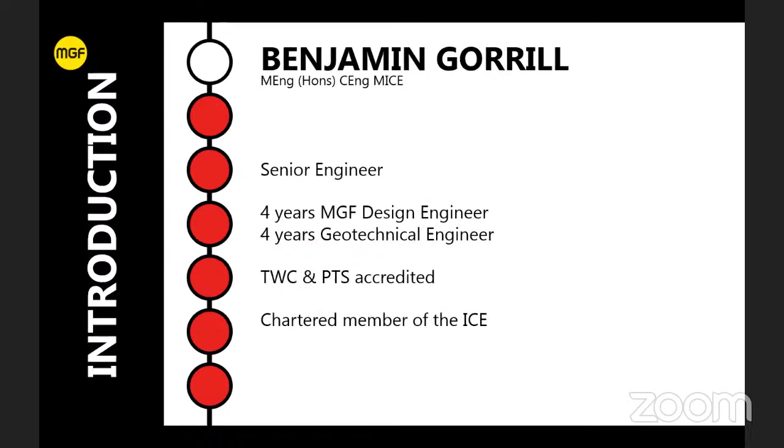Okay, so in terms of an agenda for this morning's webinar, what we'd like to do is just give an overview of how we see innovation in the rail sector. This can come in various guises, principally by collaboration, also by process and design, products, and we're going to touch on some case studies as well.

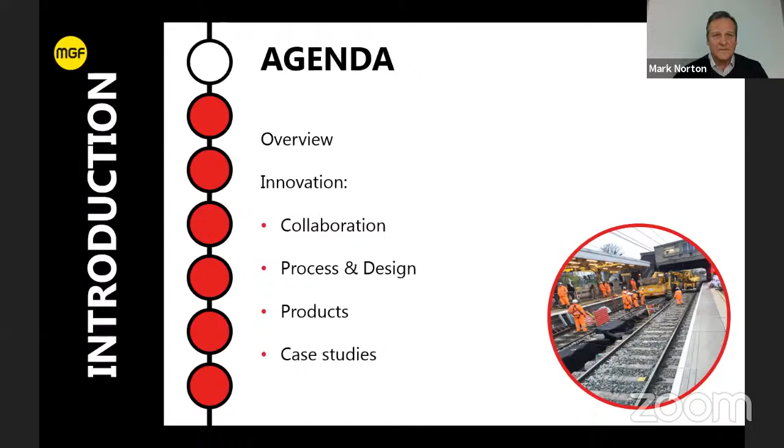So how and why is rail different? Well, the rail infrastructure is a very dangerous environment. In the past, the distant past, at the turn of the century, there were some major incidents and accidents on the rail infrastructure, which identified shortcomings in the maintenance of the infrastructure, particularly when works were going ahead. Controls were introduced by Network Rail, which must be strictly adhered to when working on the rail. These are the Network Rail standards.

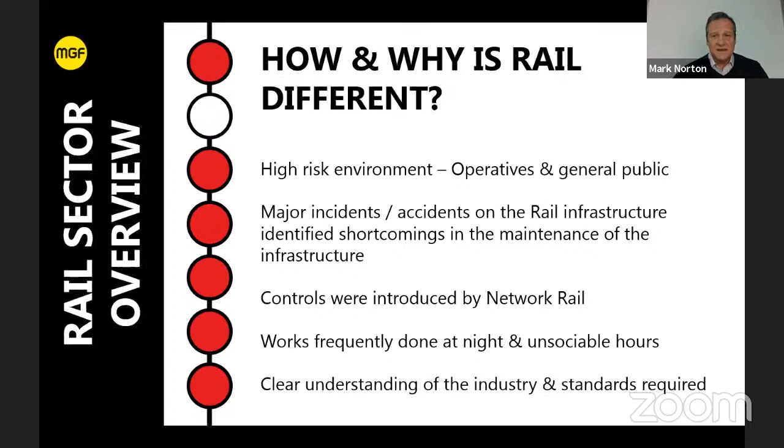Works on the rail are frequently done, as we know, at unsociable hours, i.e. at night or in the dark or on public holidays. They're a high-risk environment for operatives and the general public, and a clear understanding needs to be had of the industry and the Network Rail standards.

So how are the working practices critical when working on the rail? It's normally done in short possessions, either at weekends or alternatively at bank holidays and things like Christmas. And there's pressure on outputs and increased safety risk. It requires much planning and organisation. The works must be done safely and in line with work plans. And the consequences of getting the temporary works or the works itself going wrong are huge. Safety is compromised, works can be incomplete, which results in possession overruns.

There can be severe financial penalties and loss of reputation and future works. So an opportunity exists for us to assist contractors to provide innovative solutions via quality designs, a full service, including Network Rail forms, getting it right first time, via bespoke products and services, and ultimately a safer, faster, and improved efficiency.

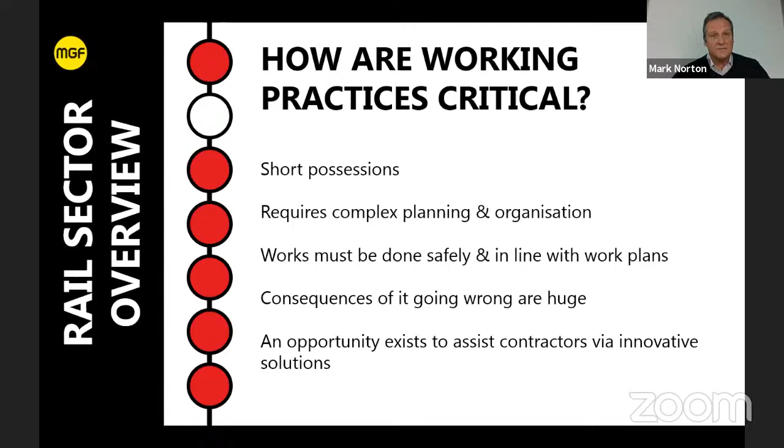So who does the work? The work is principally done by many parties. We typically engage with contractors, but we can also engage with the principal contractors. So it could be the subcontractors, principal contractors, but we also have an interface with designers, principal designers, and also in many situations, the client as well.

So we've just done a poll before, and thanks for completing the poll. If you've engaged in that, that's very good of you. We asked a question: at what grip stage would you typically engage temporary work specialists? And there's some interesting answers there. 28% said grip 4, 20% said grip 5, and 8% said grip 6.

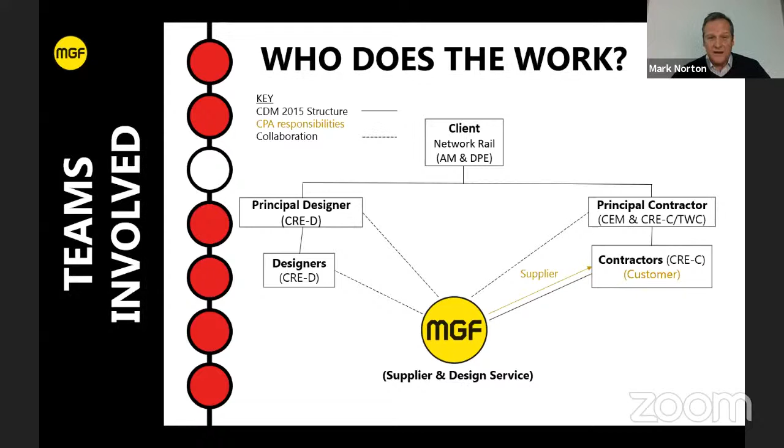I have to say, we primarily get involved and engaged at grip stage 6. Those are the grip stages shown on there. So we won't go through that in massive detail, but certainly 4, 5, and 6 are the areas where it moves from development of the design through detailed design and into construction, test, and commission.

So typically we tend to get engaged at 6, and we have to say it would be nice, or I think a good objective would be to, if we could get engaged certainly at 5, but if possible, it would be great to get engaged with the industry and the contractors at level 4 regarding upcoming schemes. I think temporary works is quite often one of the first activities required, but the last thought of, and that was the theme of our colleagues' webinar delivered a month ago by two of our colleagues.

So typically we see involvement, as we say, at grip 6. It would be good, however, if we could get involved earlier. Now we'll come on to the reasons for that shortly. There's an opportunity to highlight risks, provide solutions that may affect program and add cost. Principally by us getting involved earlier, we hopefully can reduce cost.

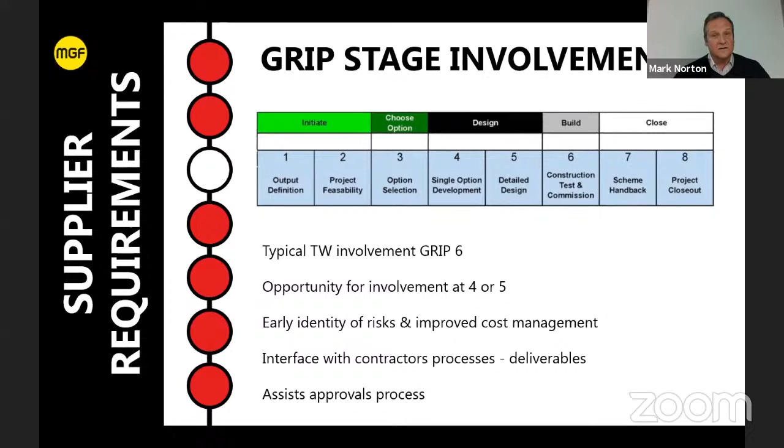We often need to work on contractors' critical path activities, and temporary works is not always thought through in terms of the process, and not least, Network Rail need time to approve. We can assist in this regard, and sooner than perhaps anticipated, via ECI - the sooner we get involved, the more we can help in terms of the thinking regarding temporary works and come up with innovative solutions. We also like to get involved with tender appraisals and conceptuals, and we can, in that process, identify risks and look at getting engaged with the temporary work schedules with the contractors.

So what are the requirements of the temporary works supplier? Well, they must have experienced rail sector staff, must be able to produce an agreed brief, which is key, and the scope of the works agreed early. We need to do design once and only once and avoid reworking if possible and cut out waste for all. Design briefs must be clear and easily understood by the temporary works designers.

Not always possible to visit sites on the early days by the designer. Quite often it could be one of our sales team who are visiting the site, and what we need to do is get that brief, a clear brief, across to our designers so they can work on it. The design produced must be simple to understand and readily understood by all in the chain, be it Network Rail, the principal contractors, the subcontractors, and ultimately the operatives and the machine drivers and everybody who's doing the work. The designs must be clear and concise and be able to be quickly approved.

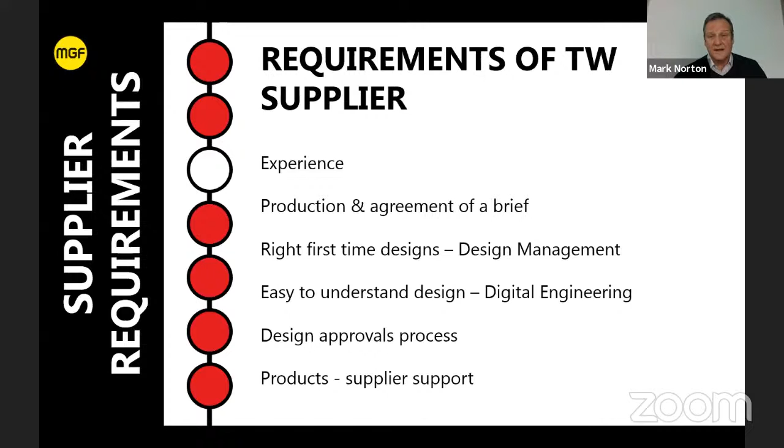The temporary works supplier should be available for on-site support if required via safe systems of work guides, for example, toolbox talks. Things change and we need to be there to support the contractor when they do, and we must have robust procedures and compliance in line with Network Rail standards.

So in terms of innovation, which is why we're here this morning, the designs produced should be quality and embrace the latest technology and products. Network Rail and the contractors are looking for the best, safest, most economical solution backed up by design.

Network Rail and the principal contractors want to know there's a design process in place, and this is transparent. The quality of the brief produced is key and will determine the quality of the design. We prepare this and share it with the customer early on for input.

We employ the latest design software and drafting tools like 3D Revit, which are clear and concise. Ben will come on to those with some examples a little bit later. And the scope of the works needs to be agreed very early in our appointment.

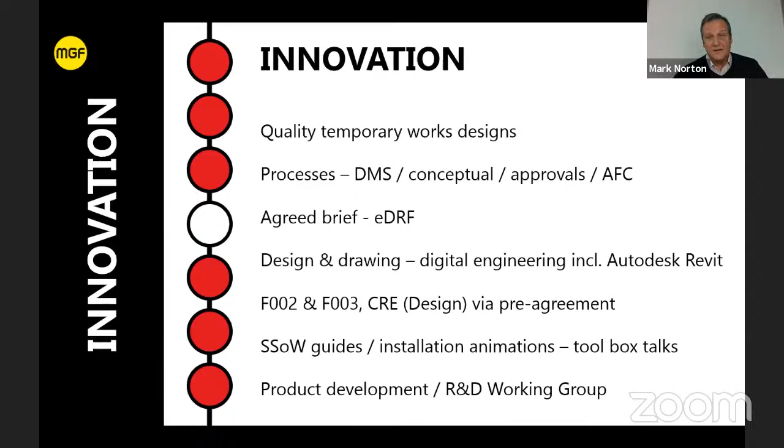MGF offer a full range, including F002s and F003s, and then we need to back this up when the job is done with safe systems of work, video animation, toolbox talks, and utilize the best products available in the market for the job, which need to be available nationally. We also get continuous improvement by listening to feedback from our customers and reinvesting through our R&D team.

So early collaboration, the first stage of our collaboration is really to get an inquiry from the customer via our technical sales team. As Emma mentioned earlier, we have a dedicated team of salespeople up and down the country who work very closely with rail sector customers. We're a small team, but we operate nationally.

We review the information which is provided to us, and quite often we need to request additional information if the information as provided is not complete.

Principally what we're looking for is a full suite of drawings, as much ground investigation information as we can get, copies of the relevant borehole logs, and photographs. Quite often we get a customer brief, and also we need to know about services overground and underground, and be able to identify hazards.

These might be working at the toe of an embankment, on top of an embankment, or within an embankment, for example. Where possible, we like to arrange a face-to-face visit, albeit in the current climate we're in at the moment, it's pretty difficult to do that in some situations.

So we're embracing modern technology with things like Microsoft Teams, but at worst case scenario, probably a phone call. And we'd like to agree the scope and timing early on.

An EDRF is prepared, which we call an electronic design request form, and we prepare that online. Ben will show some examples later on of how we get the information back from the EDRF. And we submit a copy to the customer for verification that we've interpreted it correctly.

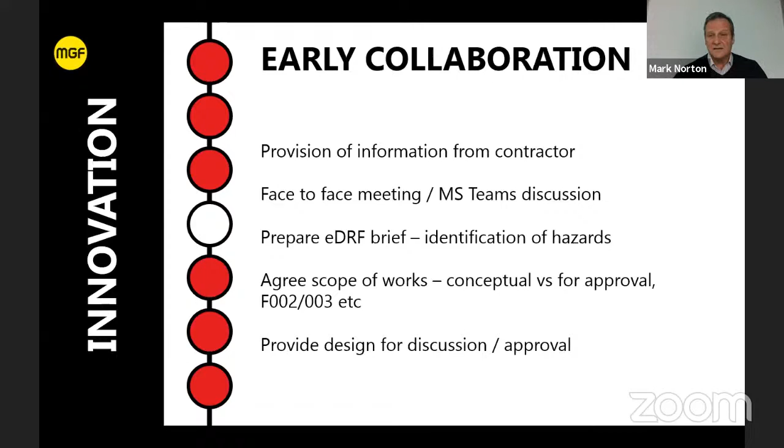So thanks for that. I'll now hand over to my colleague Ben, who will talk us through the design process and some case studies specific to rail.

Thanks, Mark. So I'm going to talk through some project examples with some animations. But firstly, I'd just like to introduce that we have a dedicated rail team within our design department, compliant with all the relevant codes of practice for temporary works listed at the top, including British Standard 5975, sometimes Euro codes, and all the relevant Network Rail codes, such as engineering management, assurance in building and civil engineering works, and geotechnical design.

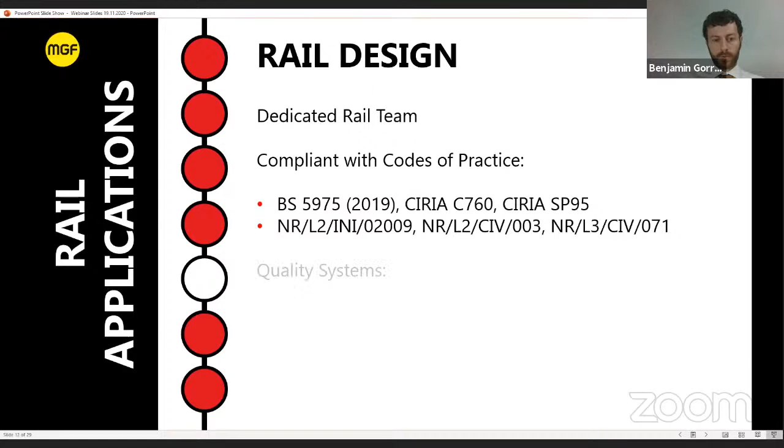In addition to this, we have some quality systems, including the EDRF that Mark's touched on, to make sure we can identify all hazards prior to carrying out a design, and a design management system. This helps our rail team to review and categorize all designs with a color coordinated system based on the risk and complexity of each design, which means that the correct designers and qualified checkers can be involved in accordance with the checking categories in the British Standard and also the Network Rail Code, the Civil Code 003.

Other initiatives include Safe by Design. We tune into the guidance notes produced by Safe by Design. We're an active member of the Temporary Works Forum, which focuses on best practice within the industry. And our research and development team look at new and innovative products quite consistently.

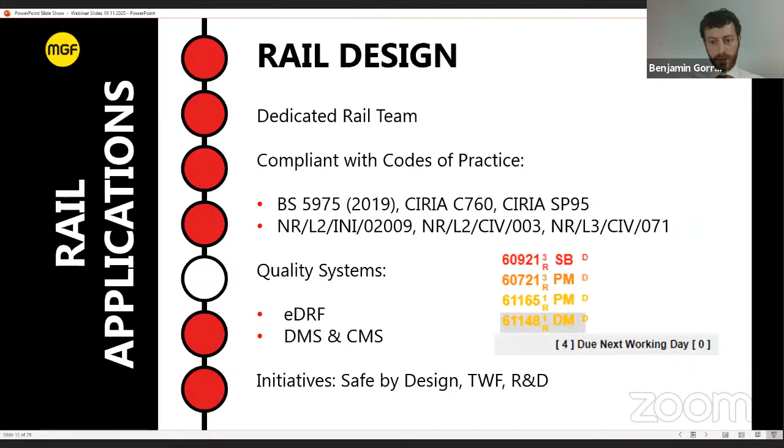In addition to the design and the calculations, we have a BIM team to level 2, which we basically use Revit software, which is capable of producing IFC files that can then be compatible with Navisworks or any other master file system. In addition to this, we have Autodesk Revit components on the website, free to download, that can then be incorporated into any master file.

And this helps to detect any clashes with permanent works, whether it be existing or new permanent works, or neighbouring temporary works. It helps to coordinate and have some spatial coordination. So this maintains speed, but with a quality output and 3D views, which is essential for identifying hazards. I'll show some examples of that later.

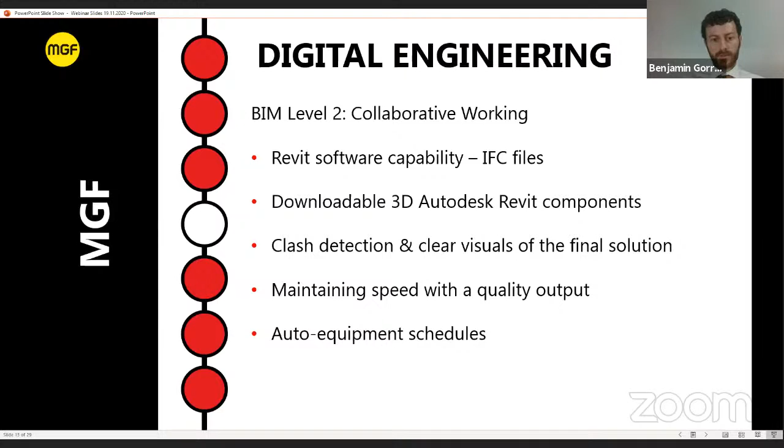In addition, we have some auto equipment scheduling as part of the Revit offering, which will list the weight and cost of each component. And we have some initiatives to also have some extra items such as embodied carbon.

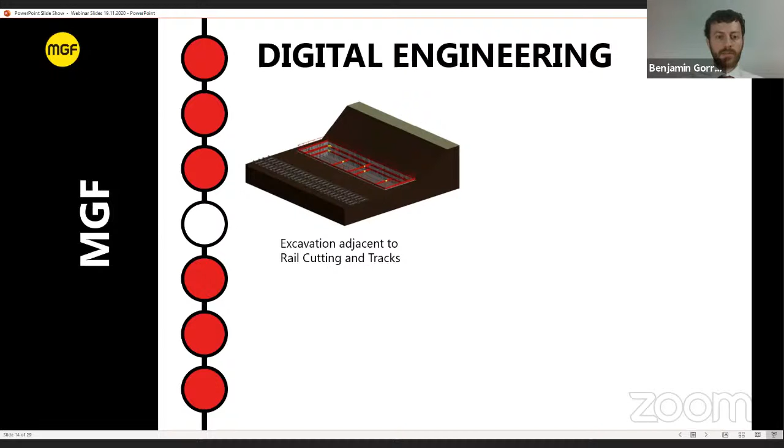Just to show some examples, this one produced by Revit shows a 3D view of an excavation between a rail cutting and rail tracks. We've got one here within an existing station.

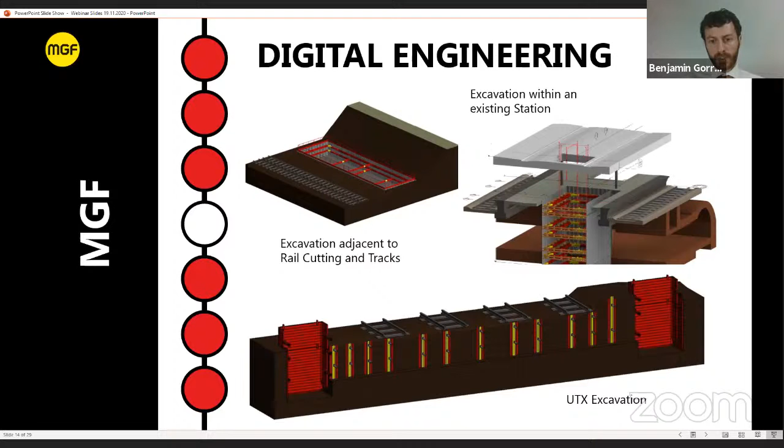What I'm going to focus on now is a UTX, or an under-track crossing excavation, with our GRP Vertishore equipment and boxes at either side to install the chambers. So challenges involved with under-track crossings basically include very short possession times, constrained sites, where there can be a limitation on using heavy plant and equipment. And also, as the temporary works or excavation crosses the rail line, there can be clashes with, say, existing cable ducts or rail tracks.

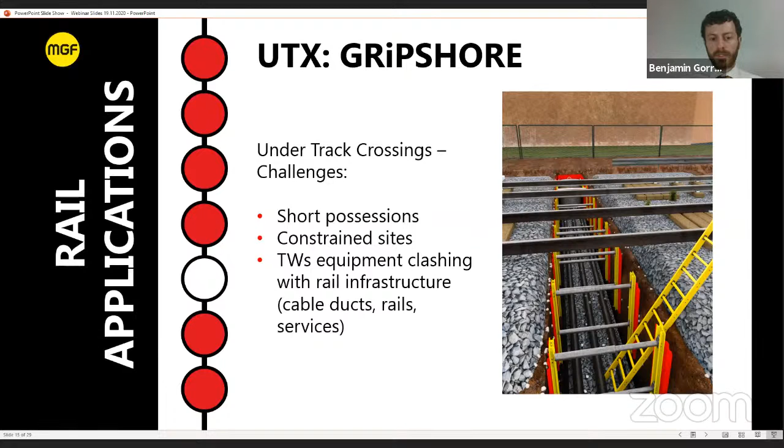So our research and development team produced this GRP equipment, glass reinforced polymer, that's very lightweight and transportable by hand. It can also be installed by hand using slings. We have a box system as shown here on the left and a Vertishore system, which allows gaps between units, accommodating any rails, cables or infrastructure that may clash with a normal temporary work solution.

In addition, it's very sustainable with low embodied carbon and energy throughout the life cycle compared to aluminium or steel equivalents. It's non-conductive, which makes it very useful on the railway. And it's very easy to assemble, and I'll show some examples on the installation sequences in a moment.

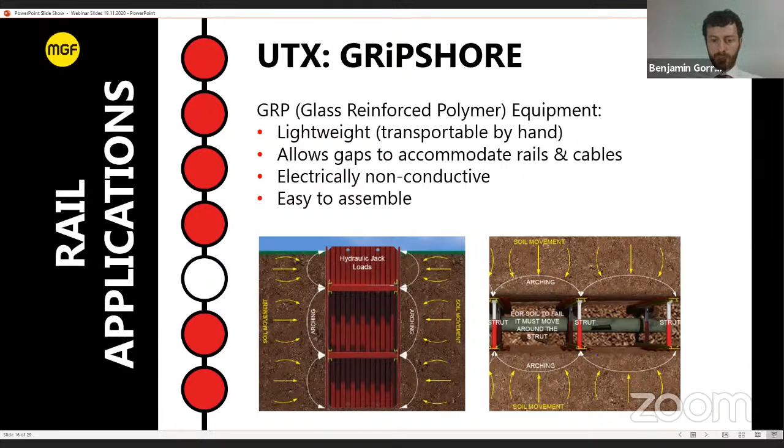Now, the gaps between the units work through soil arching. So each unit is preloaded with jacks to a specified pressure, which generates micro movements in the soil and generates an arch. So any operative can enter between two fully preloaded units.

The units themselves are basically installed with a trench pre-dug prior to lowering in the units. During the design process, we'll check the site investigation and boreholes to make sure that the ground conditions are competent and will allow soil arching to take place.

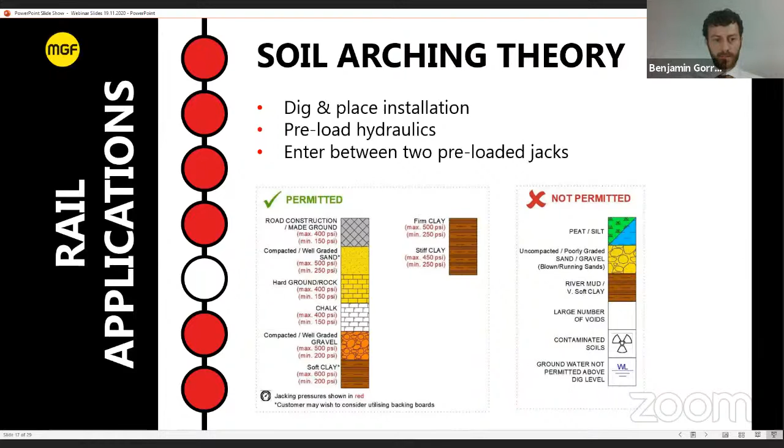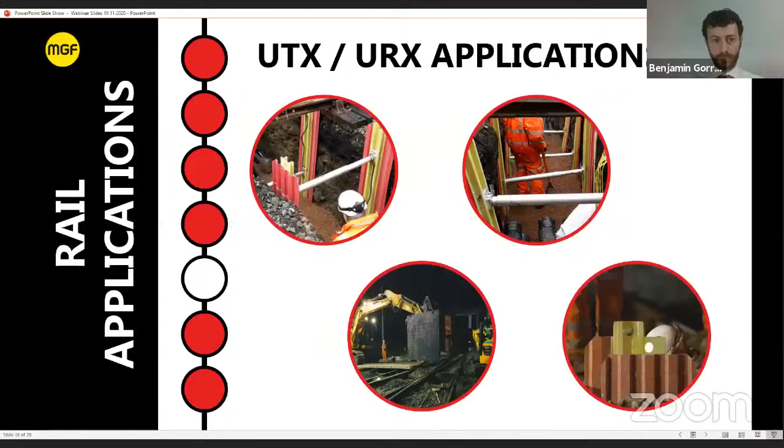As the UTX solutions are basically reviewed by our design team as Cat 0, so very low risk, simple, shallow designs, they're also applicable with standard solutions, which has been generated by our team over the last couple of years. This is where a standard design calculation has been undertaken based on predetermined conditions. Our team will then review each site specifically to make sure that all those conditions are satisfied.

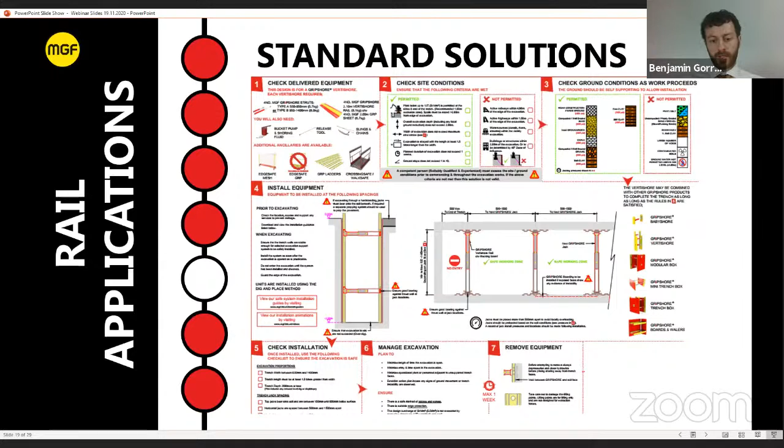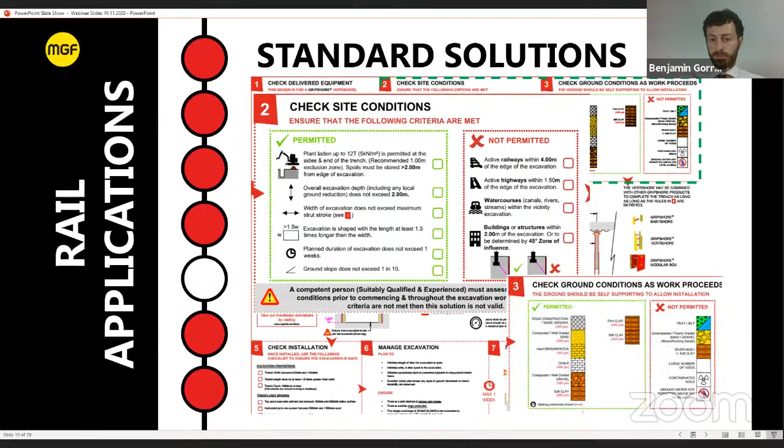This drawing is then issued to the site team, and there are some checks to be carried out prior to installing the equipment, such as a check of the site conditions and surroundings, followed by a check of the ground conditions. Once the equipment has been installed, other checks can take place while the equipment is in situ, such as making sure the gaps between the units are to the specified gaps for soil arching, and ensuring that the GRP panels are pressed firmly against the soil or the trench face to ensure soil arching.

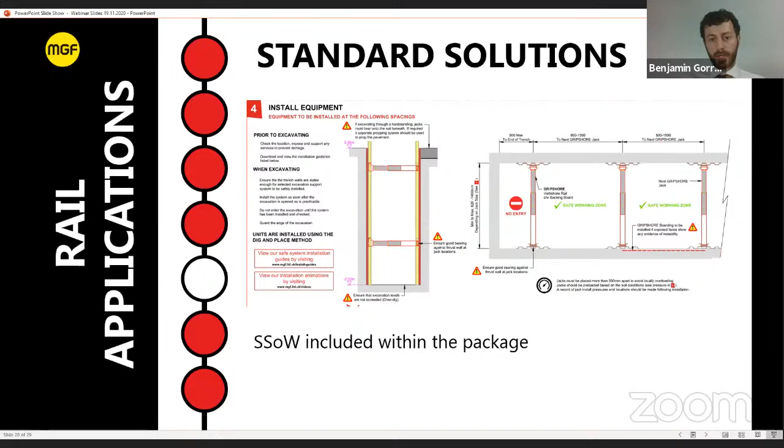With this package, there's a safe system of work, which includes animated figures showing a full installation sequence. So before I move on to platform locations and showing some examples there, I'm just going to show a short video just to reiterate what I've been saying about the UTX equipment.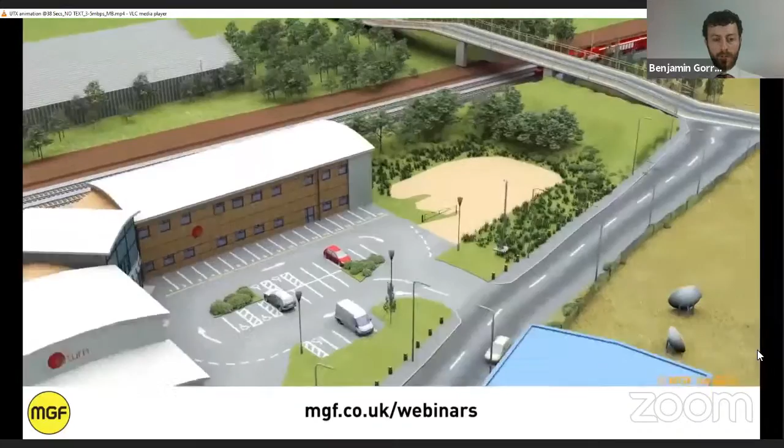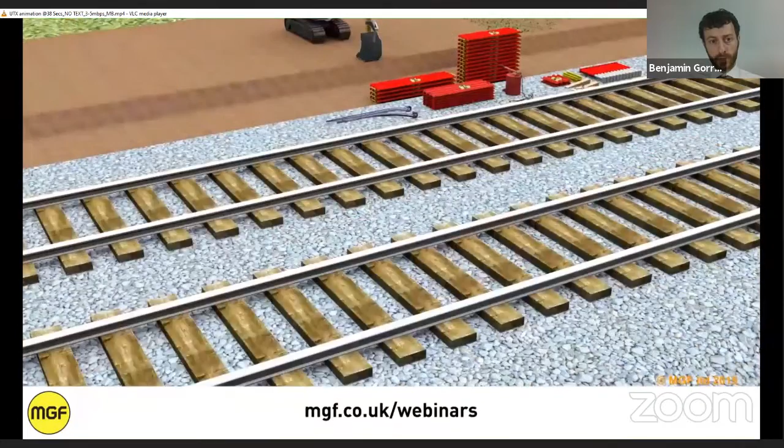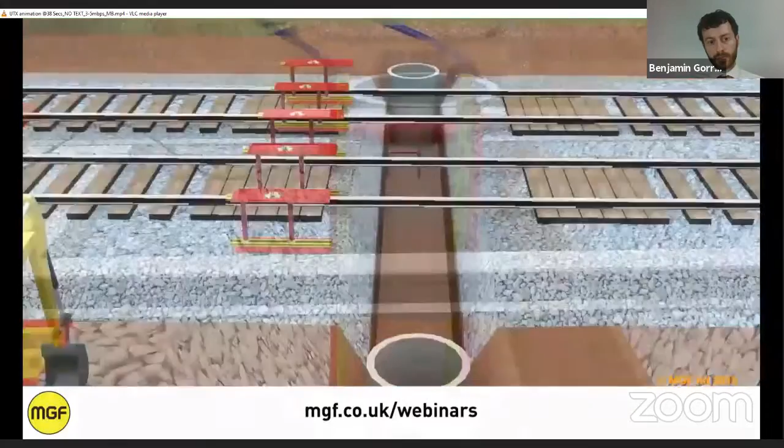For all UTX works, the railway will be under full possession. This example shows our GRP Vertishor units with backing boards being installed to lay the cable ducts under the railway. It can be installed by hand and lowered into the excavation using slings. Any voids must be backfilled. The units are then pressurized at a predetermined PSI pressure prior to laying the cable ducts and removing the equipment and backfilling the excavation.

So now I'll just go back to the slides and platform locations. There's a current incentive to make platforms more accessible on tight, restricted sites, to make sure there's a pedestrian interface to manage safety and practicality challenges. Solutions include lightweight equipment for ease of transport and use, and a thorough design process to identify all the surrounding hazards.

Oh, sorry. Sorry about that, everyone, technical issue.

So just to reintroduce, platform locations is a current incentive to make platforms more accessible. The challenges are installing new stairways or new lift shafts, with excavations within the platforms. Being in a platform location, it's very tight and restricted sites. There's a pedestrian interface to manage and safety and practicality challenges associated with that. Our solutions would always include lightweight equipment where possible for ease of transport in and out of sites and ease of use, encouraging efficient solutions. Also, we look at a very thorough design process to identify the surrounding rail hazards, which comes back to what Mark was saying in terms of early collaboration and making sure the brief identifies all the hazards on the site. Then we will look at installation sequences that align with the permanent work sequence.

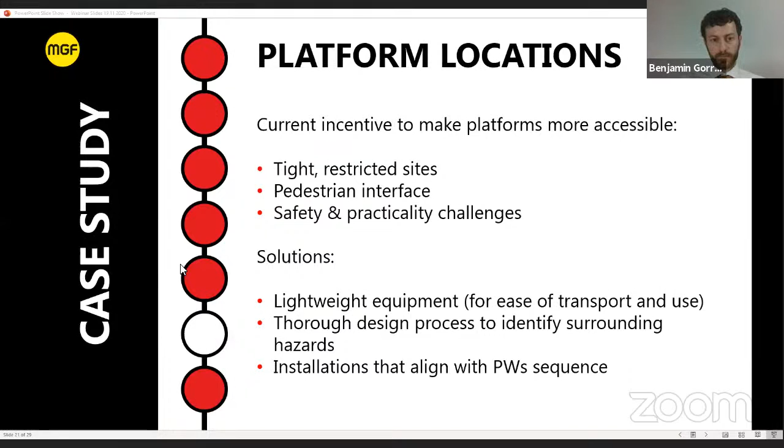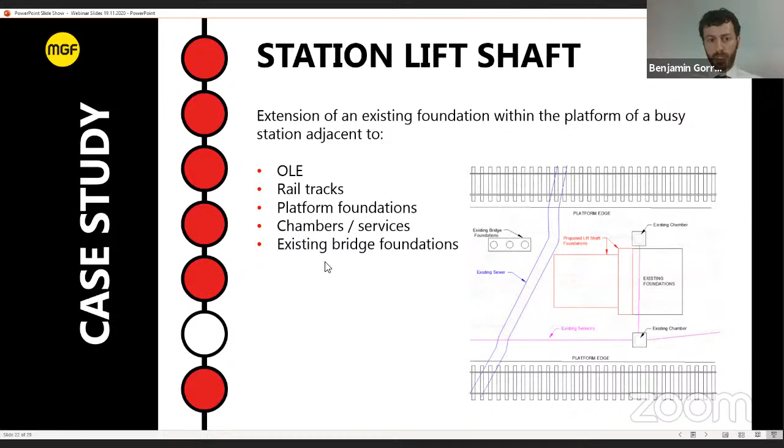So I'm going to show an example on a major UK station, where 2 foundations were to be installed, one larger one on the left here, and one smaller one to be jointed into the existing foundations. Surrounding these proposed excavations, there was an existing sewer, the platform foundations, the rail tracks, and existing bridge foundations and chambers. So quite a lot to take into account by design and by the site team.

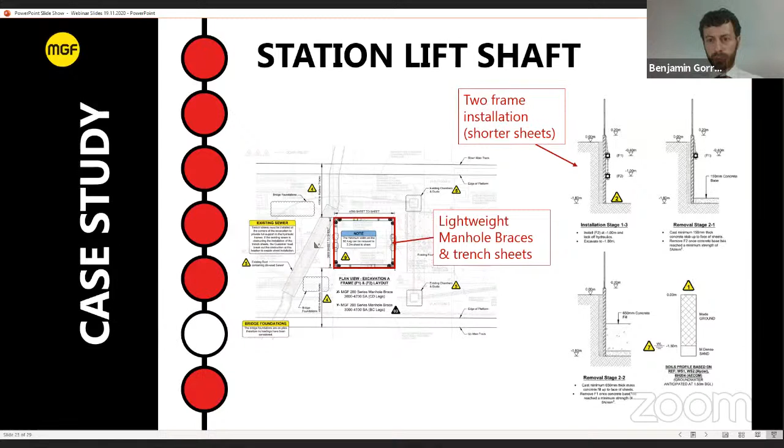To install the first foundation on the left, we looked at a lightweight manhole brace and trench sheet system, which would basically have 2 frames, using shorter sheets then, not requiring a toe-in below the actual formation level of the excavation, to reduce the depth influence of the excavation and the effects on the surrounding infrastructure. Also, a dig and push installation method that would prevent pre-driving of sheets and any vibrations that could affect the surrounding infrastructure. As part of the installation sequence, we looked at a method that would involve a concrete blinding being cast after the 2 frames have been installed, allowing the second frame removal. This would then allow the foundations to be cast in one pour using the sheets as a back shutter for a very efficient permanent work solution.

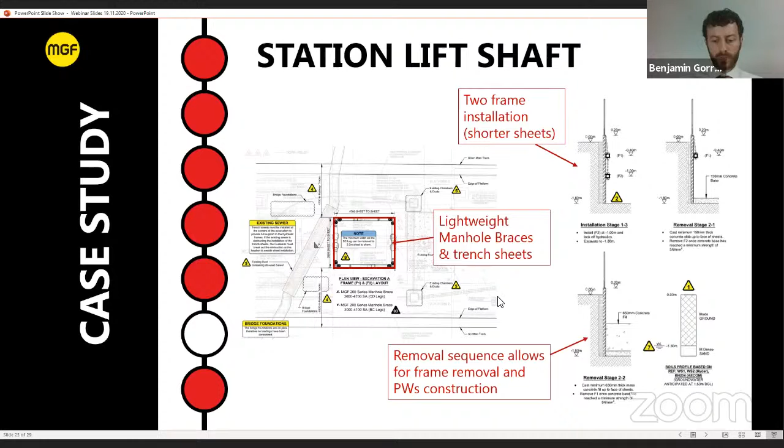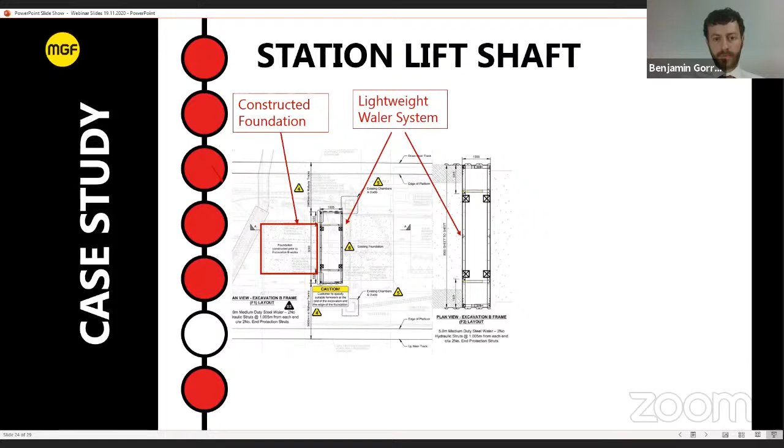On the next excavation in between the 2 foundations, we looked at a lightweight waler system, which would be situated between the concrete with sheets at either end to support the ground. This was installed with the same installation and removal sequence to aid permanent works efficiency.

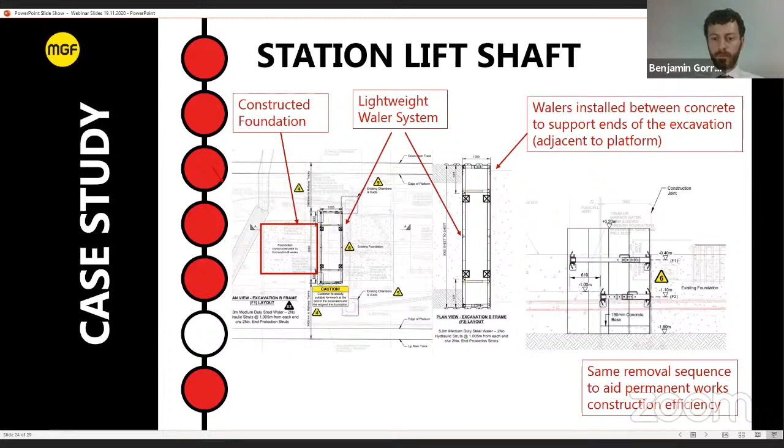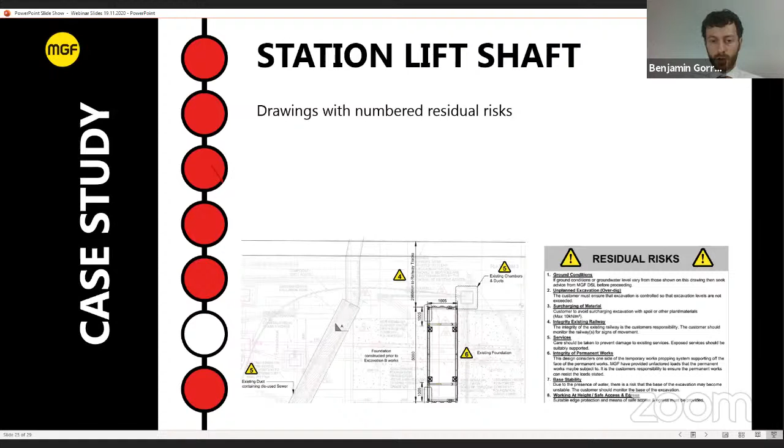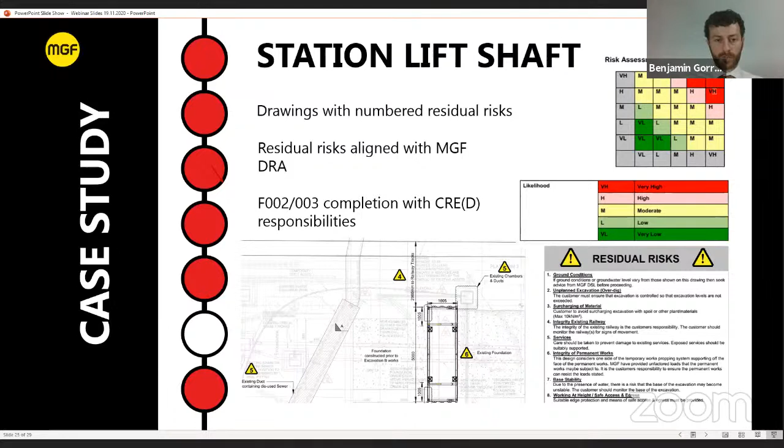As part of this solution, we had a very clear drawing system with permanent works underlays and a numbered residual risk system, which highlighted any risks that couldn't be fully reduced by design and any site control measures required by the site team. This was agreed in collaboration with the contractor, and a designer's risk assessment was included as part of the package, which included a risk assessment matrix showing the impact and probability of any risks. This documented the design reduction measures and all control measures to be carried out on site, and was supplied with a form 2 and 3 simultaneously.

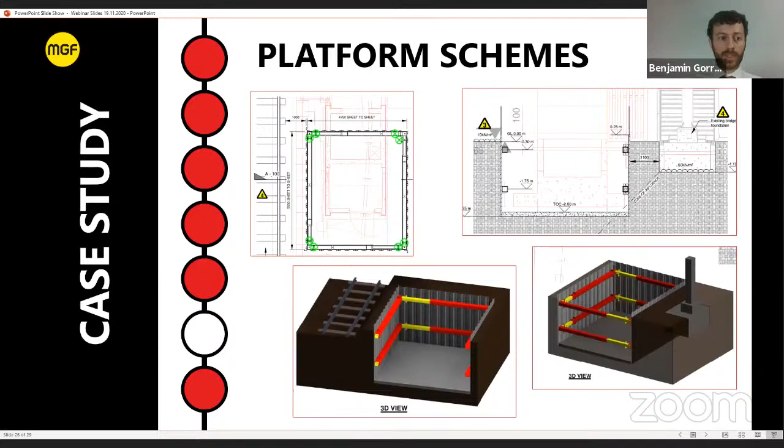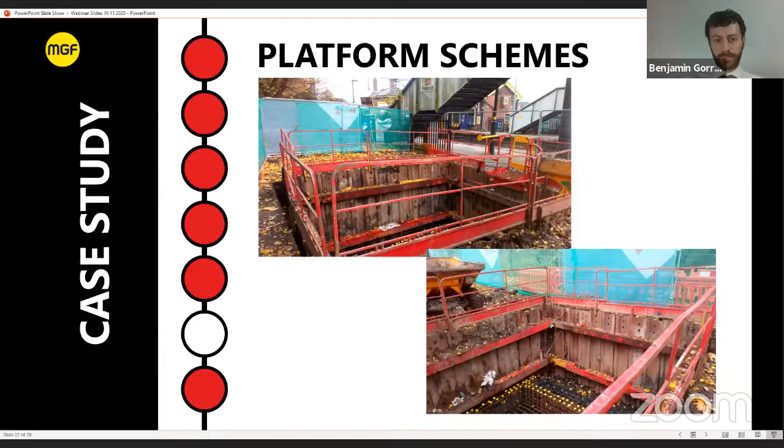Just before we conclude, I'm going to show another example with an animation this time, just showing excavations we carried out adjacent to an existing retaining wall and a main line.

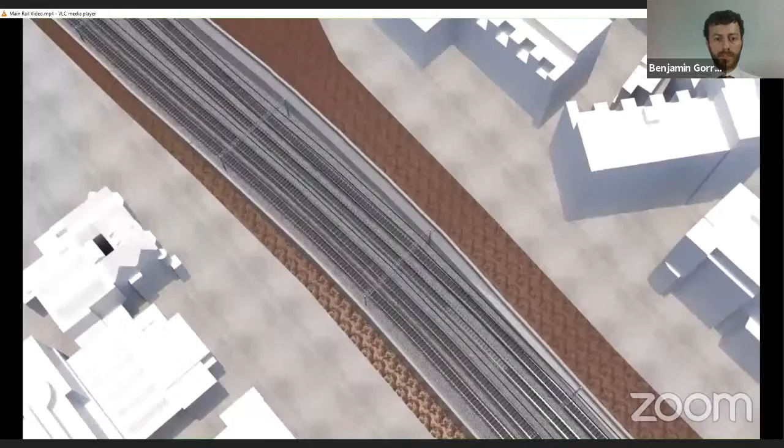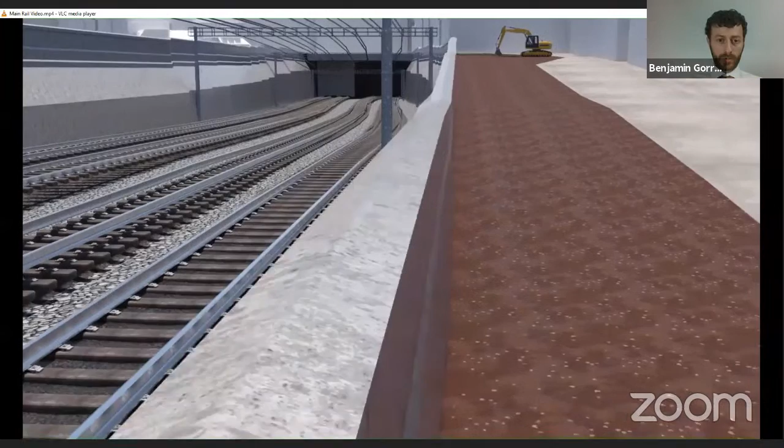So this was in a major UK city and involved a lot of collaboration with the principal designer and principal contractor. The works would basically consist of digging a number of trenches adjacent to an existing Victorian wall to uncover the foundations of the wall and also to check the condition of the wall.

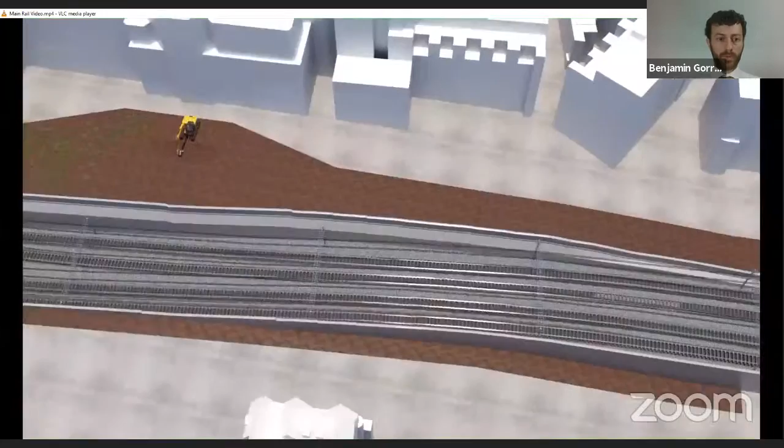The ground level was different at all locations. So what I'm going to do now is just focus on two locations, one which was an excavation above the railway and one that was an excavation below the actual tracks.

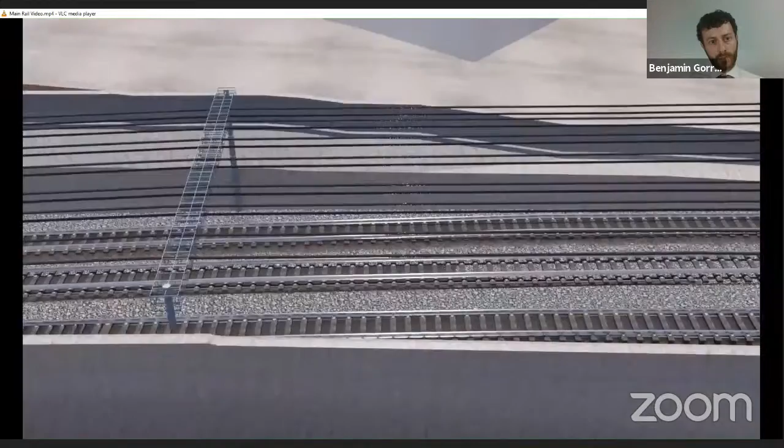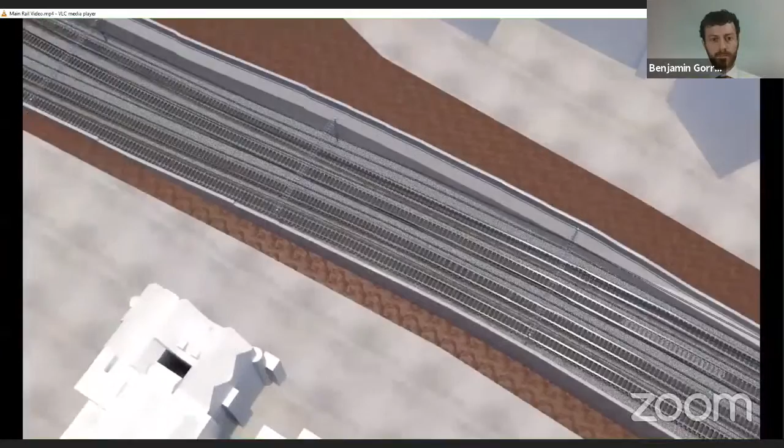This involved, again, a lot of collaboration with the principal designer and principal contractor, with the principal designer carrying out global stability checks of the wall and the principal contractor monitoring the wall throughout the works. The railway, being a main line, was fully operational during the works.

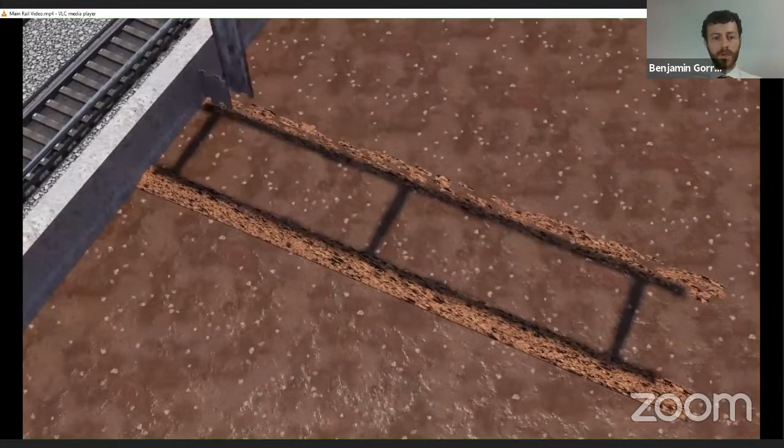So we had to make sure from MGF's point of view that the installation sequences would have minimal effects on the existing infrastructure. For the first excavation, we determined a slip trench installation method to remove any hard driving conditions and minimize vibrations when driving sheets.

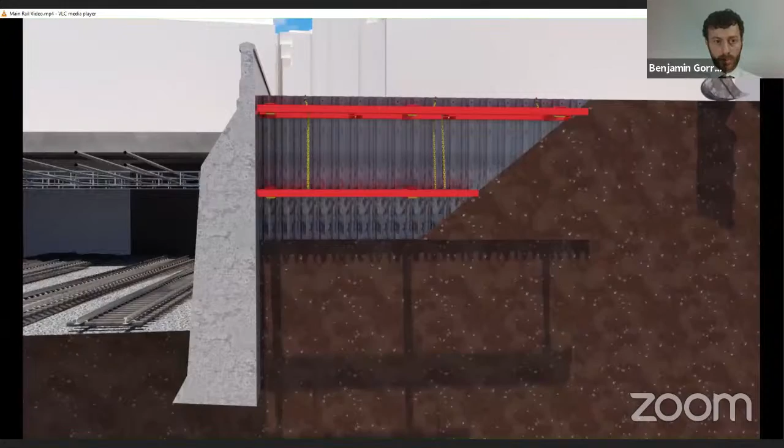This would then allow two frames to be installed, and we looked at a two-sided excavation where one side would be battered opposite to the retaining wall. This would prevent any load transfer through the frames, loading the wall at concentrated points.

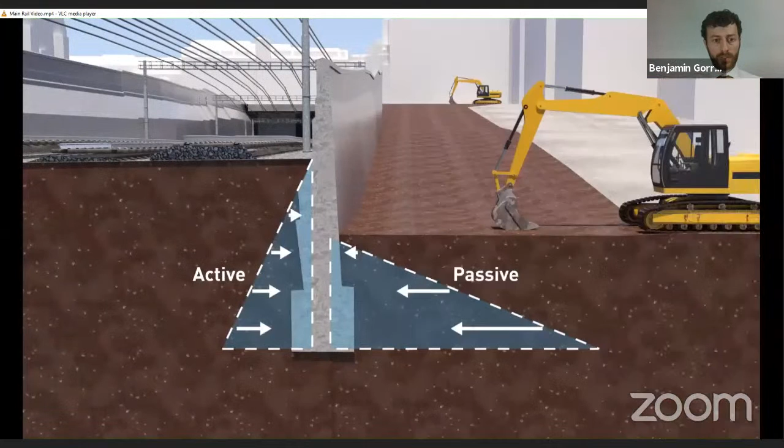Next, we looked at a trench which was actually below the rail tracks. Our concerns here were excavating into the passive soil on one side of the retaining wall, and the active loads coming from the other side, and also being below the actual rail tracks, so considering railway loading.

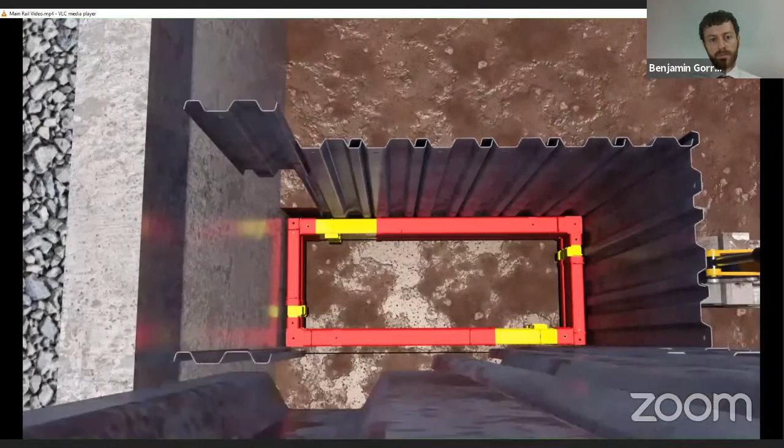As an installation, we looked at a dig and push lowering frame sequence, where two frames would be fully preloaded at all times, allowing another frame to be lowered during the installation process.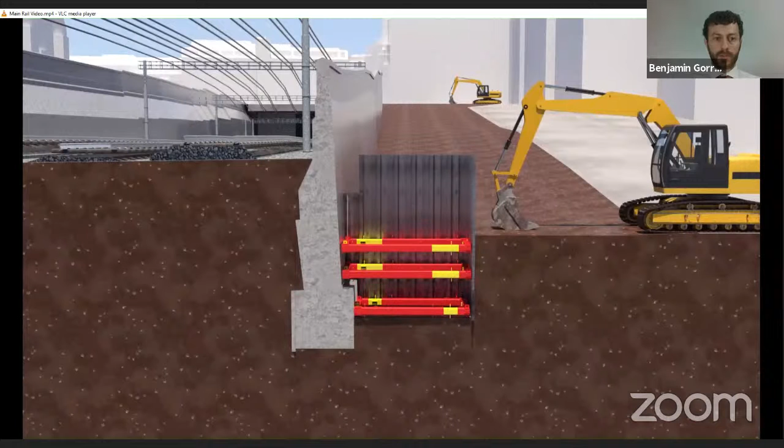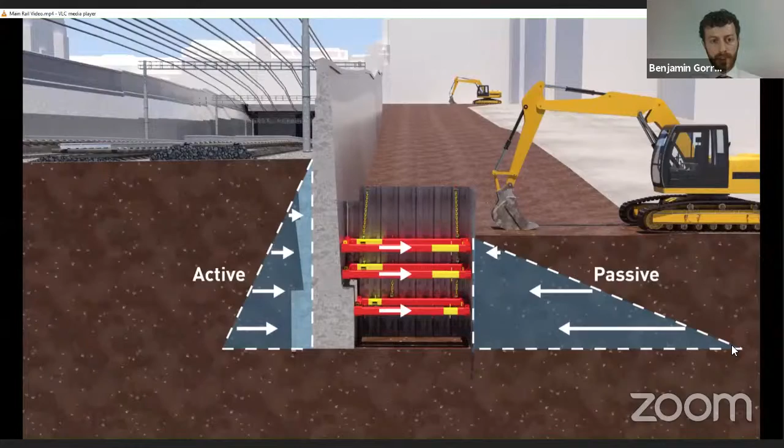This would make sure that the wall had support at all times, and we basically did hand calculations to check the active pressure, including the railway loading, to then determine the frames had capacity to resist this pressure and transfer it through to the soil on the other side of the excavation, therefore minimising any impacts to the wall, which was fully monitored throughout this work.

So that's the end of that example. I'm now going to hand over to Mark, who can conclude.